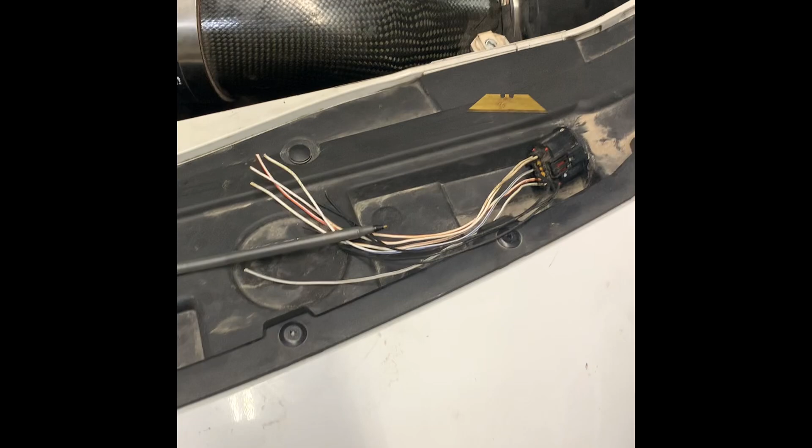Alright guys, I'm about to show y'all how to wire up the headlights. So this is the Challenger pigtail, because it's connected to the harness still. This is the 300 headlight pigtail that goes to this headlight. I got all this information off the website - it's called Mopar Connection Repair Kit.

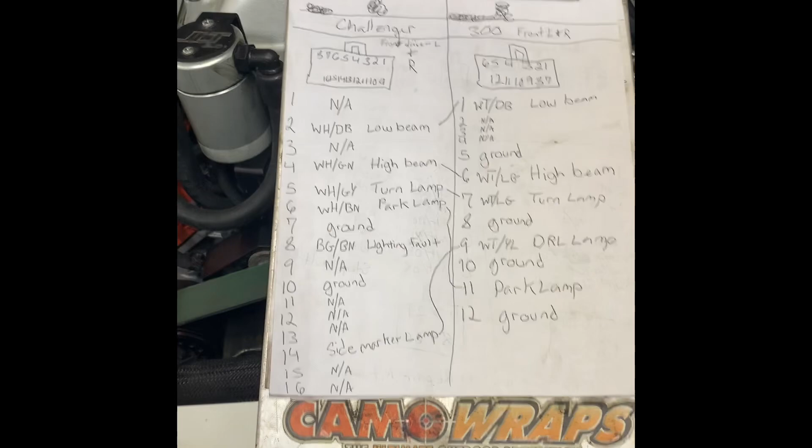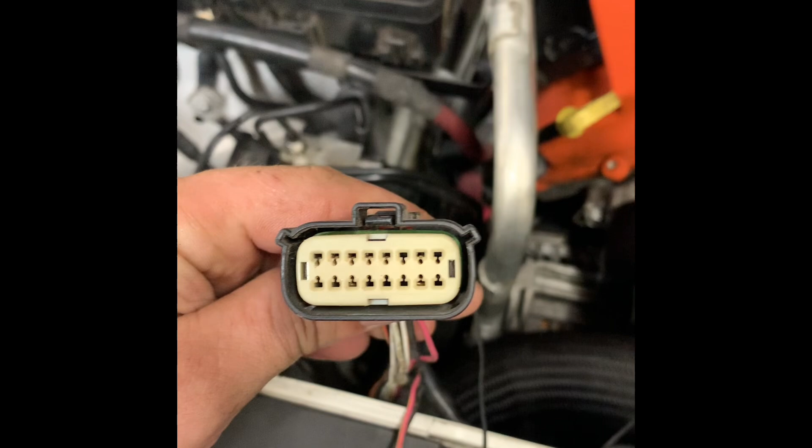You just put in your year, make, and model. On the Challenger side, I put in 2018 Challenger and pulled it up. It gives you a list of all the pigtails throughout the whole car, so I went through the list and found front, driver, left and right, whatever. That's the pigtail right here - you look at it like that, it's the pigtail that clips upward. So it goes 1 through 8, 9 through 16, just like that.

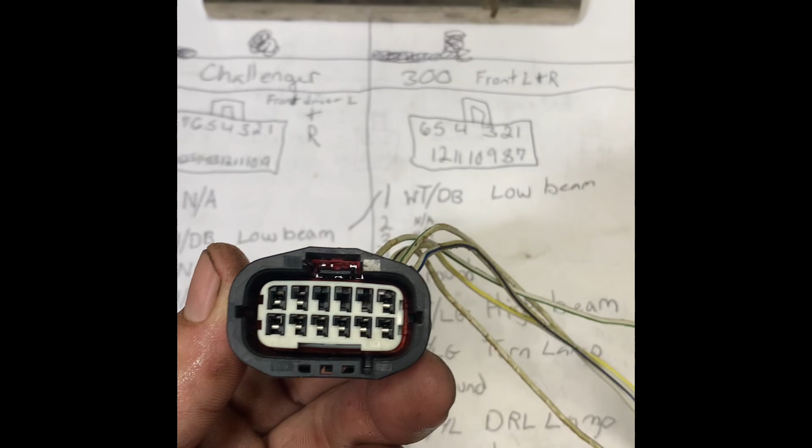This is the information for the 300 headlight. It clips upward, it's 1 through 6, 7 through 12, just like that. And this is your information right here - it tells you what each pin is, since I went ahead and wrote it down.

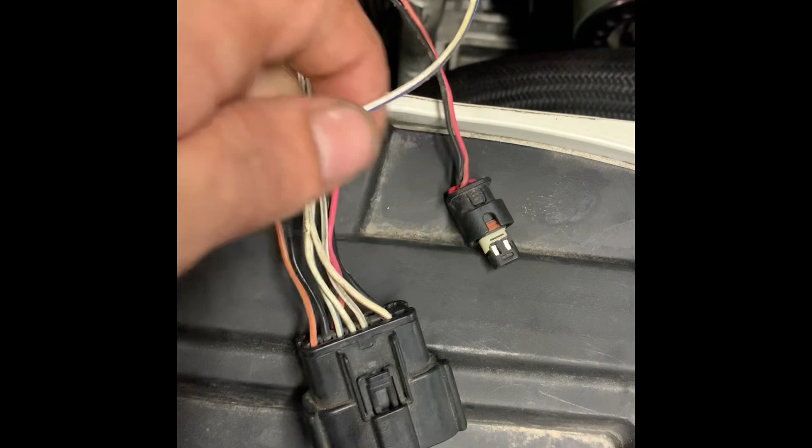So basically what we're going to be doing is - pin 2 on this Challenger plug is the low beam, pin 1 on the 300 plug is the low beam. So what we'll do is match those wires up. Pin 1 on the 300 plug, which should be this one, we'd match it up to pin 2, which would be this one. So we'd match those two wires together - butt them together, solder them together, whatever.

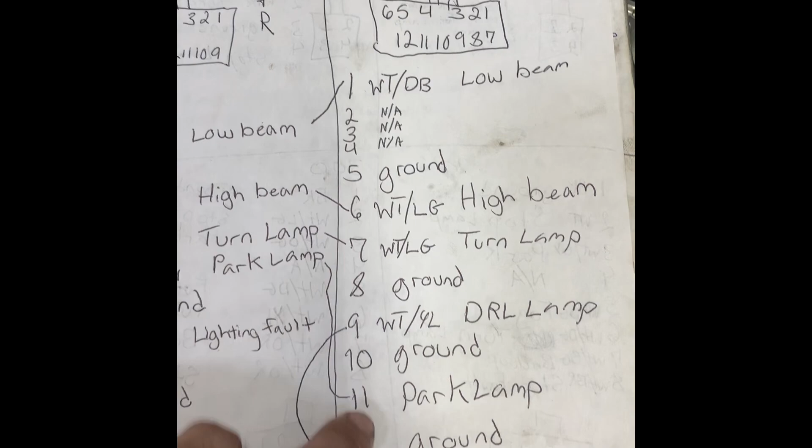Basically that's it. And you see all the blacks are the grounds - you go through, ground, ground, ground, ground. Same thing on this side, they've got ground, ground, ground. So basically what you do is hook up all the grounds together. Sometimes you'll have more grounds on one plug than the other - that's okay, you just double up, putting 2 of these grounds connected to 1 of these grounds just to even it out, or whatever the case may be.

This is an extra - you see the pink and ground on these two. These are basically the same system, which is the side marker lamp. On the Challenger, it's got the halos - these are what controls the halo, which is the side marker. So these two is what we would connect to.

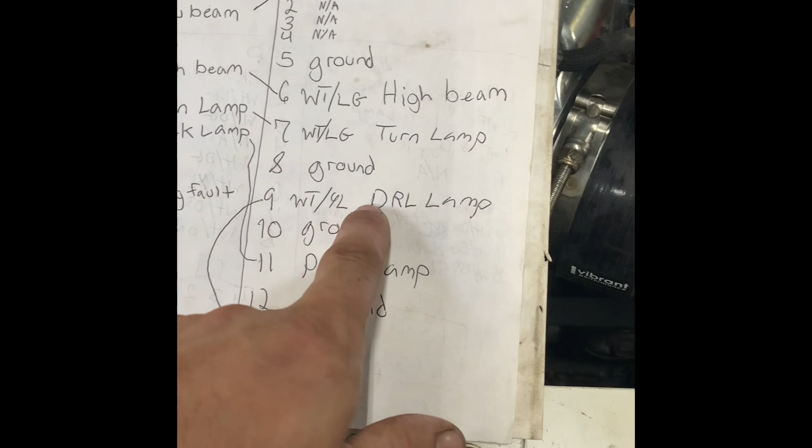DRL stands for daytime running lamp. So basically it would be the outline right here. We would hook those wires up to that on this pigtail - daytime running lamp, so that would be this one right here.

On the Challenger it'd be the halos - we have 2 of them on the Challenger, and on the 300 it only has 1. So what we would do is cap one of these pink wires, because that's the voltage coming in. We'll cut that off and cap the end up so it doesn't rub against anything, and just use one of those to feed into this.

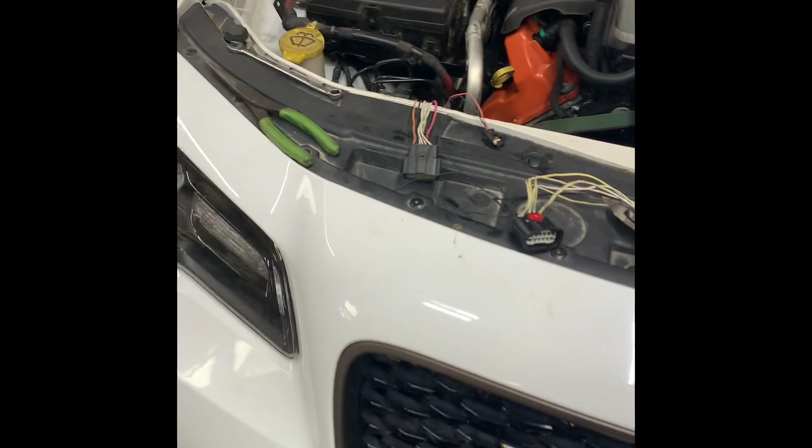Later on, if we want to, we could run this to something like a fog light. I'm not sure, but I'm about to get this wired up, and in a minute I'll be turning the headlights on and showing y'all everything, seeing how it works.

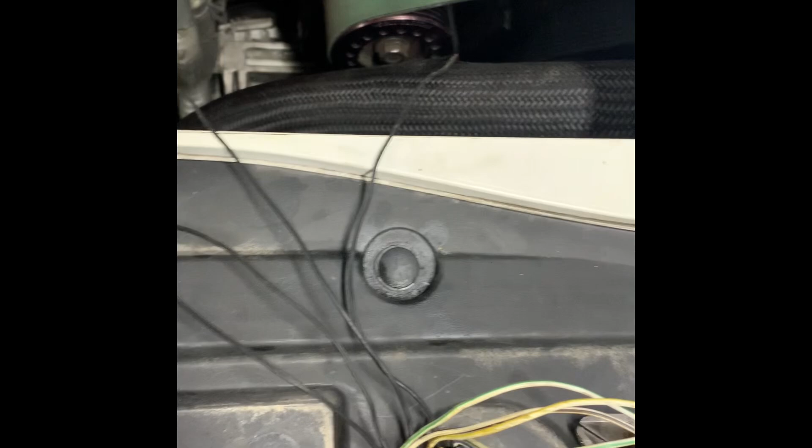Alright, so this is what I was saying. On this side we only have 3 grounds, 3 black wires on this side, and on the 300 pigtail we have 4. So basically what I'll do is butt those 2 together to one of these, 1 to 1, 1 to 1, and it usually works out like that every time, because a ground's just a ground. But we want every pin to have ground, so we'll double those up and run it to 1.

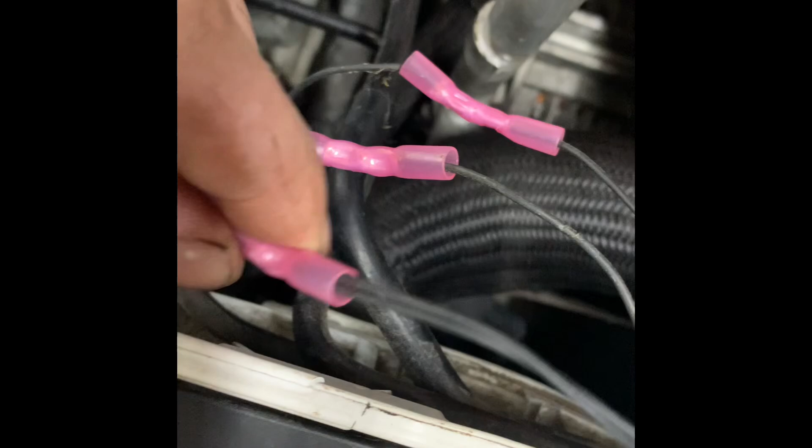Alright, so this is how I did it. Double the 2 grounds, 1 on that side, single, single, single, single. Now, on the grounds, it does not matter which ground goes to which wire on either side, because it's a ground. They're all practically connected, so it doesn't matter which way you go.

Now on the pigtail sides, on all your voltage signals, it does matter which way you go. Now I don't go off a color, which the website does give you descriptions of colors. I write them down anyway, but I really don't go off the color. I go off of the location on where the pin is located in the pigtail, so no matter what, you know for sure.

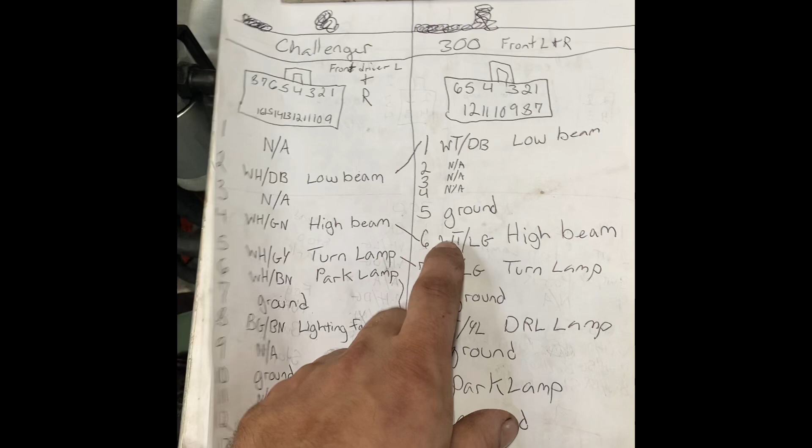So like I got pin 6, I go to pin 6. I know for sure pin 6 is gonna be the high beam, not even going off the color, because as you can see, white, light green, white, light green. So you can't go off the color because there's 2 different pins that are gonna be the same color.

And 9 times out of 10, sometimes the harness is not what color it says in the description. Sometimes it'd be a different color, just because different years and different harnesses, whatever. But that's why I usually just go off of the pin.

So I'm about to go off the pin. The first one would be my low beam, so I'm about to connect pin 2 on the Challenger and pin 1 on the 300. So I'm about to connect those and then work my way on down the list.

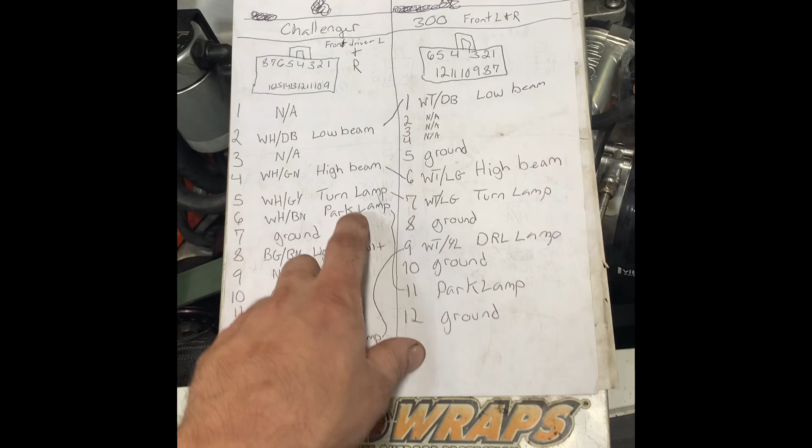And I go to the high beams, connect the high beams. I go to the turn lamp, connect the turn lamp, then the park lamp, then the daytime running lamp, which would be the side marker lamp on the Challenger side. So I'm about to go ahead and hook all those up on this side and get it working.

Alright, so I got all of them swapped over. There's one left over, which is the lighting fault, so that one does not need to be hooked up at all. So like I did on this pink wire, I just cut it down there, not hooking up nothing to it.

So basically that's what I'm gonna do with this one. I'm just gonna cut it down so nothing affects it, then put a piece of electrical tape over the top of it, or a twist nut or something like that. So basically I got them all wired up.

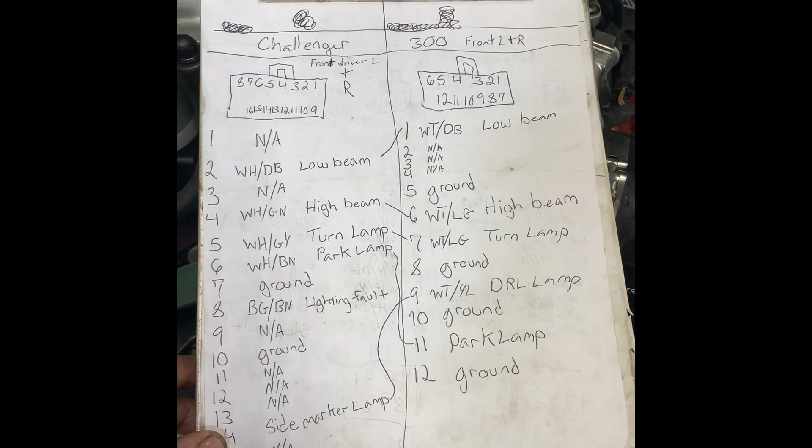Basic, easy, you know, go to the website, find the right connectors, put in the right car. If you don't put in the right car, you're obviously not gonna get the right connector. But do that, get your information however you like, screenshot it, save it, download it, write it, transfer it over to a piece of paper, whatever, just to get your information.

It's basically really easy. Once you get this information, it's common sense. But if you don't have this information, you're gonna be shooting in the dark with a voltage meter and power probe trying to figure it out. Before I found the website, that was the way I'd do it. I would just voltage test everything while somebody's in there flipping switches and stuff. But I'm about to plug it in now and see how everything works.

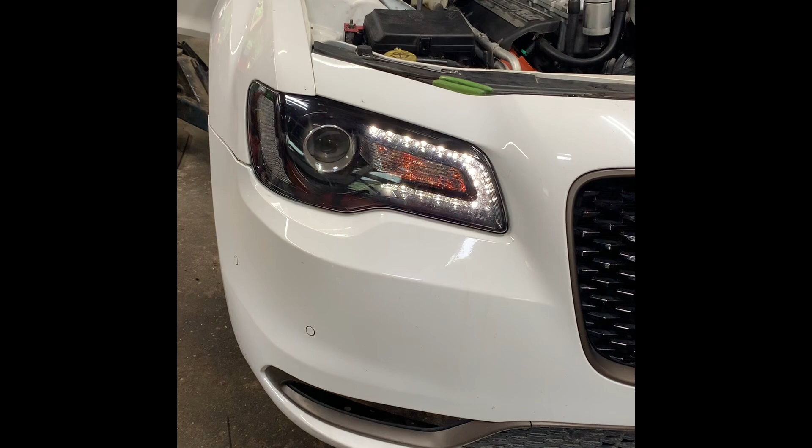So we got the daytime running light working and we got the blinker working. We're about to check the headlights, but we got some type of wiring issue going on in the car. For some reason we can't get the ignition to turn on.

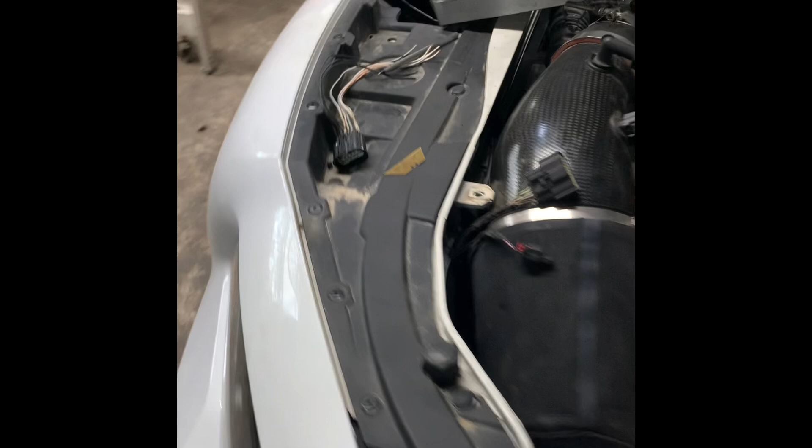I'm just gonna keep finishing up wiring the headlight. I got this side wired in all the way, I know it's gonna work. I've already did this swap before with a 392 and everything works, but we got to figure out what's going on with the electrical system, why the ignition's not powering on. This is just nothing, but we'll figure it out.

We're about to tear apart the whole car to go over the whole harness one more time and make sure we got everything plugged in. All right, so we figured it out. The body control module, one of the plugs wasn't even plugged in all the way, and one of the plugs in the back for the control module back there wasn't plugged in all the way either. So we got those plugged in all the way. Ignition turns on, headlights work, taillights work, everything works now.

So all we need now is the fuel line, put coolant in the intercooler and radiator, and install the coolant plugs in the block. Whenever we got the block brought to the machine shop, they did all the machine work, but they didn't put the freeze plugs back in. So we ordered them at O'Reilly's. We're about to go pick them up, install them in the block, and run coolant in the car.

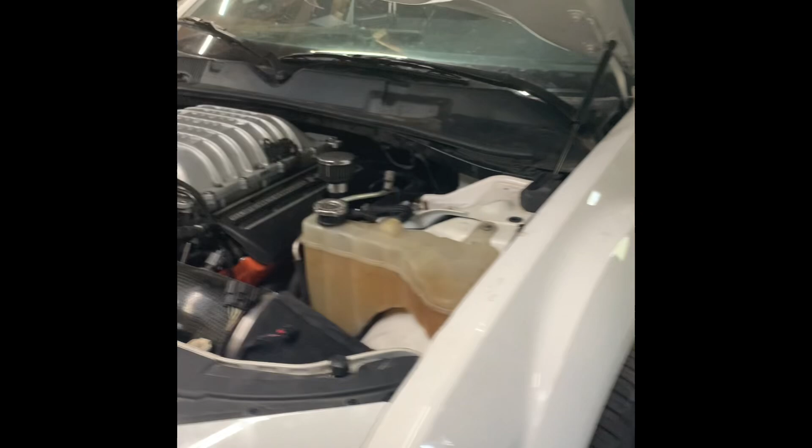All we're waiting on now is literally, I still got to wire up this whole headlight assembly, but all we're waiting on now is a fuel line. We ordered the fuel line kit, a steel braided fuel line and return, but we're just waiting on that in the mail, and then we'll be able to fire up.

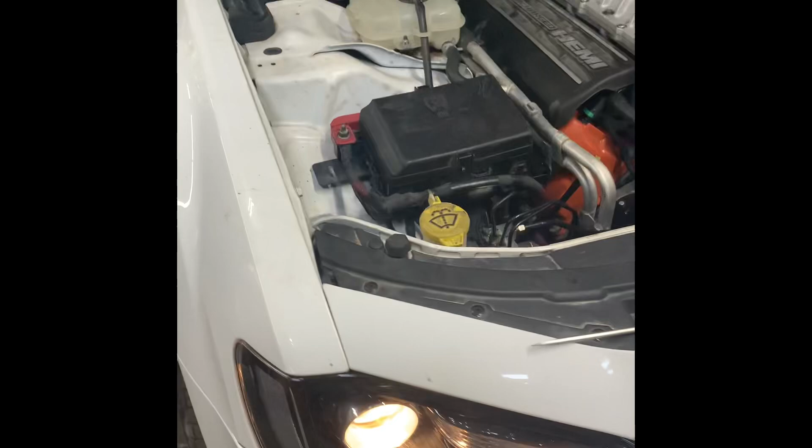We done tore apart the whole inside trying to figure out what the problem was, and putting it all back together now. Figured out the problem, got it all fixed up. Ooh, look at them taillights, that's the running lights right there along with the headlights. Let me just cut them off. Oh yeah, I need the key, but anyway, we got everything working, just gotta install everything back up.

Still having problems figuring out the brake switch on these, so we haven't wired up the brake switch or the turn signals yet, still trying to figure that out. I'm doing research on it, trial and error. But I'm about to go ahead and wire up this headlight, finish that, and we're gonna tidy up the whole interior, and we'll just be waiting on the fuel line.

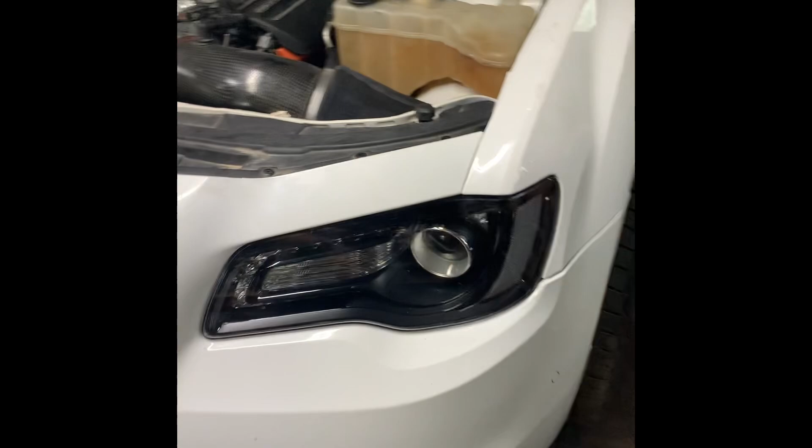All right, so I just finished wiring up this headlight. I had that headlight wired up already, just finished this one. I'm about to flip the switch and see if the headlights work. Switch is on. Headlights are working.

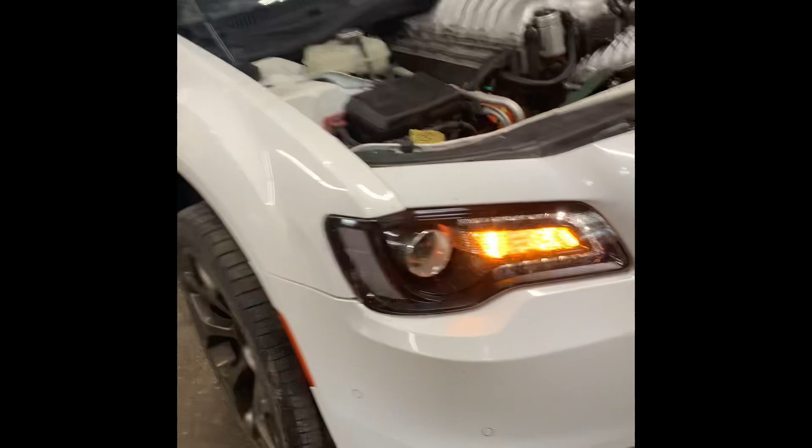All right, now let's put it on the running lights. See, running lights. Oh yeah. All right, now let's check if the blinkers work. Just hit the hazards. Hell yeah. So everything's working with the headlights in the front, working great.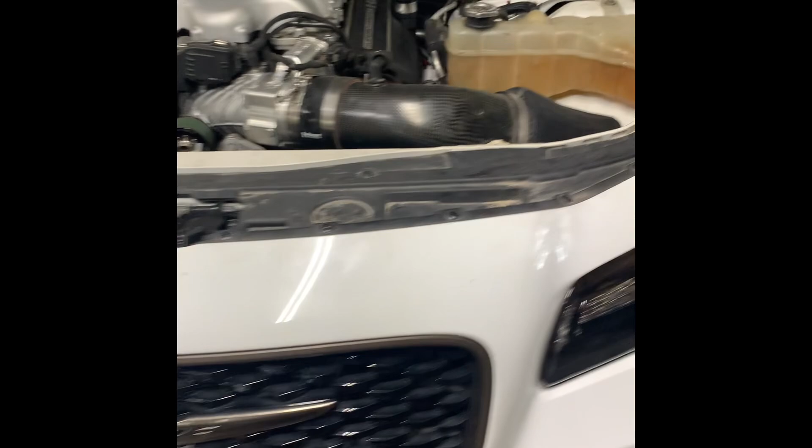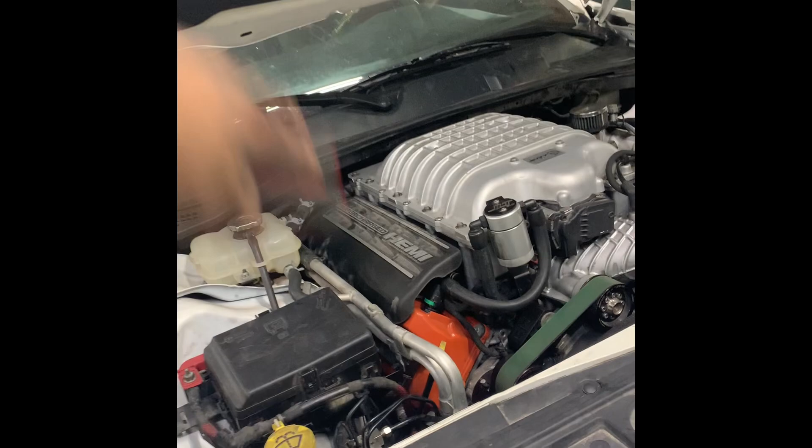Alright, so we got the headlights wired up. Now we're working on the taillights. So far we got running lights working, and that's it. We still gotta do blinkers, stop, and reverse light, still got to figure that out. So far we only got the running lights working, so I'm about to do some more research on that and play with the wires with my voltmeter and power probe. I'm about to get to that now, and as soon as I get those rear taillights fixed and working, I'll take a video of them working and how I got them wired up. Then all we gotta do now is the fuel line. The fuel line is the only thing stopping us from firing up this engine.

The only thing is that fuel line needs to hurry up. We ordered it and it's supposed to be here today, but so far we ain't got it. Hopefully we'll have it tomorrow and we can get this thing fired up.

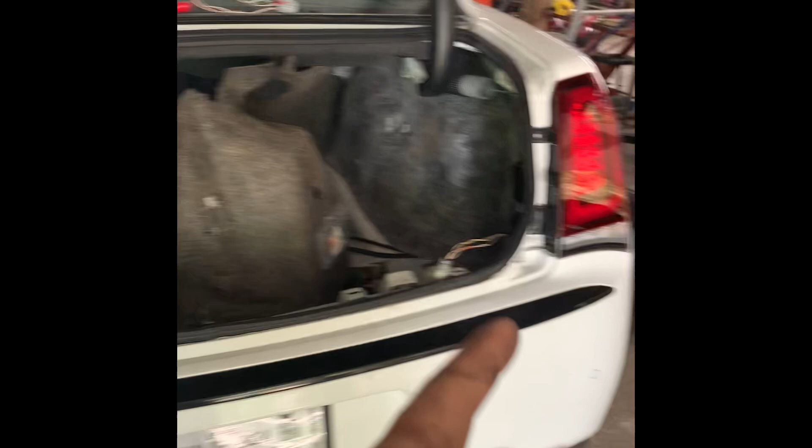But for now, I'm gonna keep playing with these taillights and hopefully get them working. All right guys, I'm gonna show y'all how to wire up the taillights right now. These are the pigtails, the original pigtails for these taillights, and as you can see, they plug in.

And these are the Dodge Challenger ones, you see they're still in the harness. This is the Dodge Challenger body harness in this 300 - we did all that just to make it run. So we're gonna rewire this plug to this plug, and I'm about to show y'all how to do that. Same thing on this side.

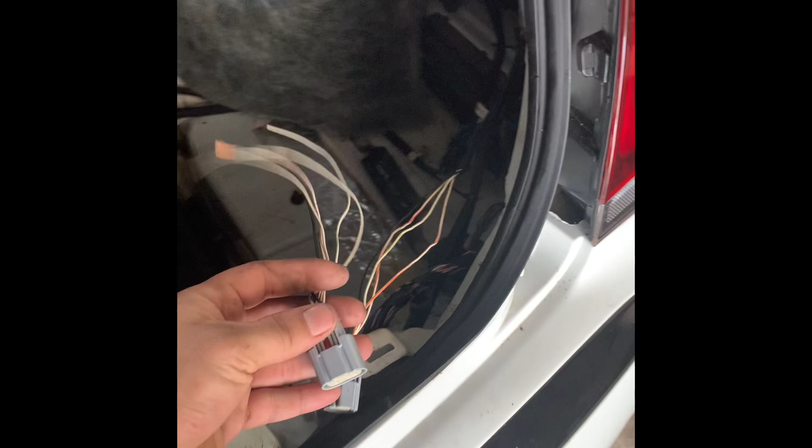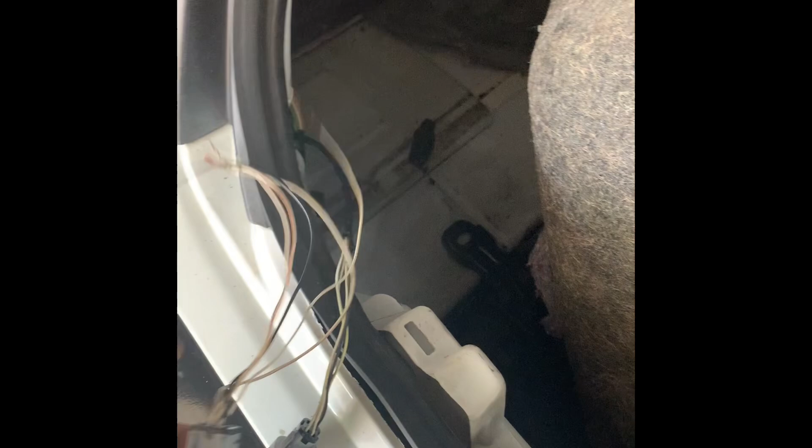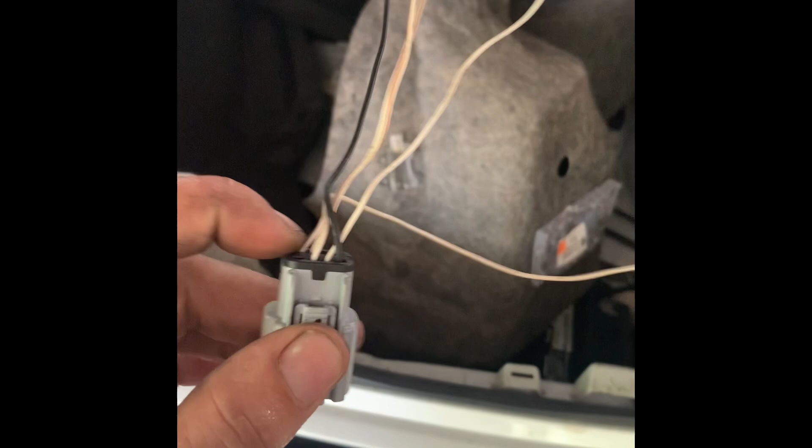Basically what we're gonna do is tie these wires into these wires. On the internet there's a website called Dodge Connector Fix - you look that up on Google, and when you click that, you put in what kind of car you're looking for, and it'll bust out a whole list of all the pigtail connectors throughout the whole car. It'll literally tell you what each wire is and give you a description, tell you where it's at in the plug, show you which one it is, the color of the wire, everything.

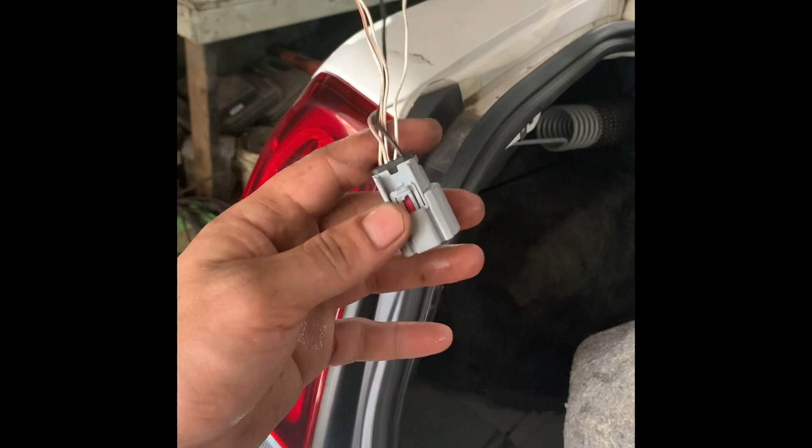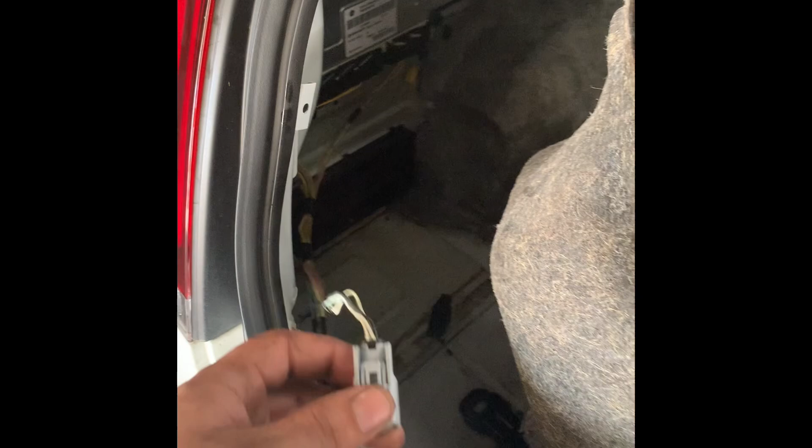So basically I'm gonna go in there and look up this year 300, and take a screenshot - that would be these pigtails. Then I'm gonna go look up the Challenger, the year, make and model that this harness came out of, and go to the taillights. There's gonna be multiple different options, you just scroll through and find what pigtail you're looking for. So go through this, then take a screenshot, you got your screenshots on your phone or computer, whatever.

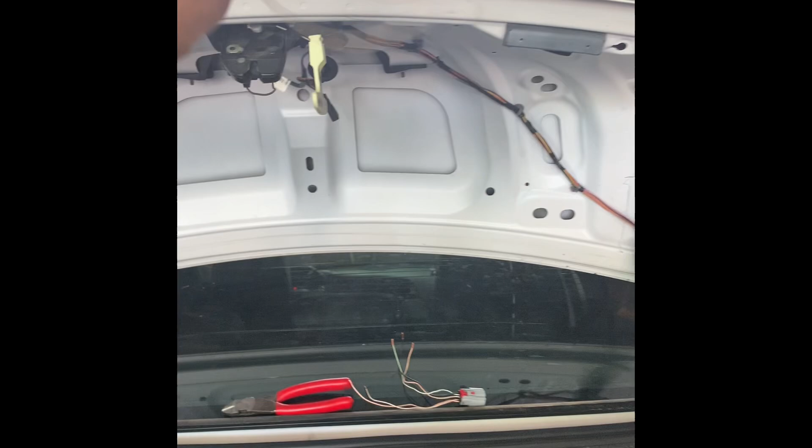Then you just sit there and cut the wire and literally butt them up. Now this one has 5 and this one has 4, so 4 of these are going to get used, and there's going to be one more wire left over, meaning that's your reverse light, because this does not have the reverse light wire in it. If you follow the wires up to this plug right here, this has your reverse light wire right here. So you're going to have to wire that all the way back through and hook it up to both sides so you can have reverse lights, because on the Challenger the reverse lights were in the 3rd taillight across the back.

So it's pretty common sense, you just got to go to that website and look up each connector and take screenshots or whatever you got to do to remember it, write it down, whatnot. But it'll literally tell you where each wire goes, the color of the wire, and what the wire is.

Now obviously this black one, that's a ground, and it's going to be a ground on this side too. So those, you can see on this one there's a black one, ground - those you can automatically just hook up because you already know that's a ground. So that would be the first thing you do - just hook up that ground, boom, wire those in. Then you would go look at the diagram and just match them up. It's that easy.

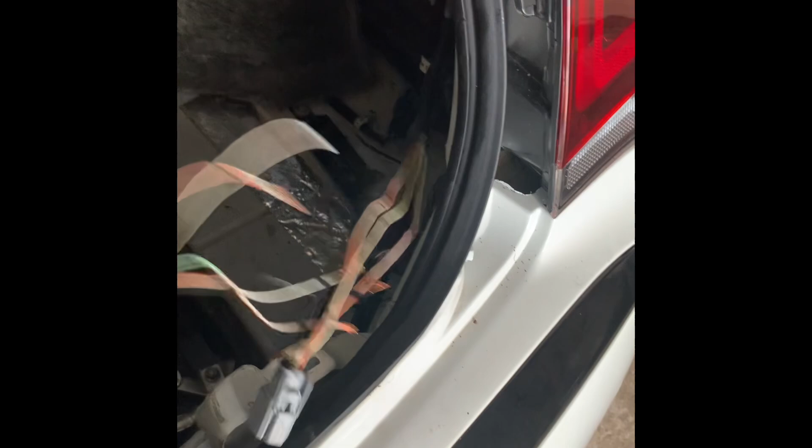So I'm about to cut this, prep them, match them all up, and we'll see if we got the brake lights working or not.

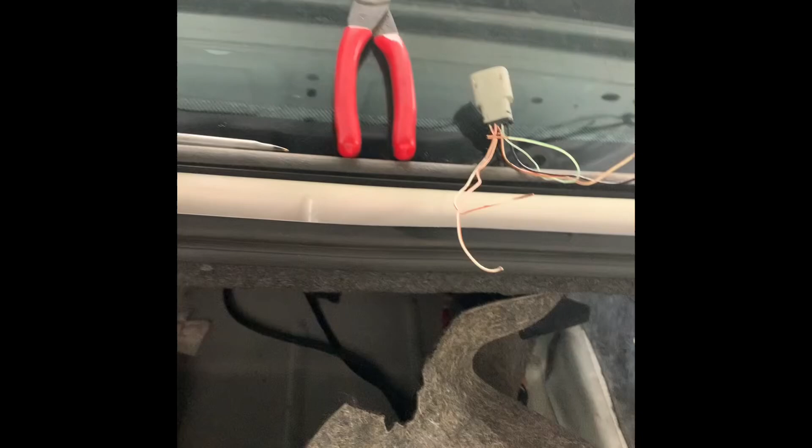All right, so I made y'all a little diagram on these pigtails. Like I was saying, these are original pigtails for the 300, and this is the Challenger pigtail. So I made this little paper diagram right off of the website I was just telling y'all about - Mopar Connection Repair Kit. You type that in on Google and it'll literally be the first thing pulled up. I think it's Connection Repair Kit dot mopar dot com is the actual website.

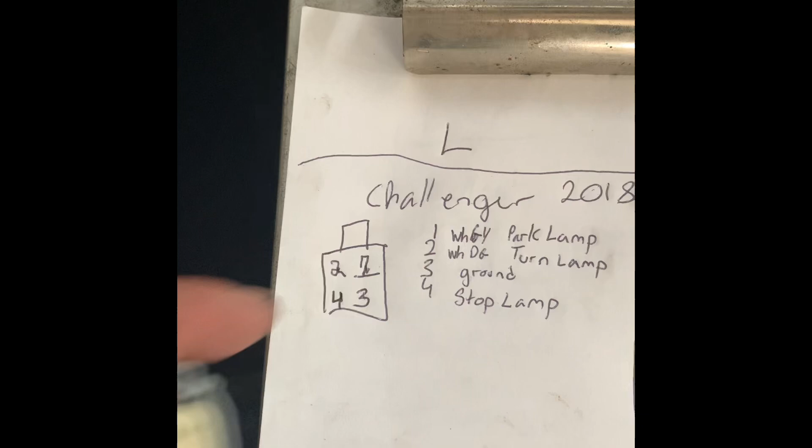So as you can see, we got a 4-pronged pigtail. This is the Dodge Challenger, left and right, the Challenger 18. So I got the pigtail right. Now you got 1, 2, 3, 4, those are the pins right here. Starting from right to left, 1, 2, 3, 4 would be the pins, and these are the descriptions of the pins.

1, white gray, or whatever, would be the park, and then white dark green would be the turn lamp, and number 3 is the ground, number 4 would be the stoplight.

As you can see, these are the wires. You see the black one's the ground, right? Number 3, ground, so those are always going to be ground. Go down to the pigtail for the 300, you see got number 1's ground, right? So go look here, number 1, black, ground. So that's how you tell.

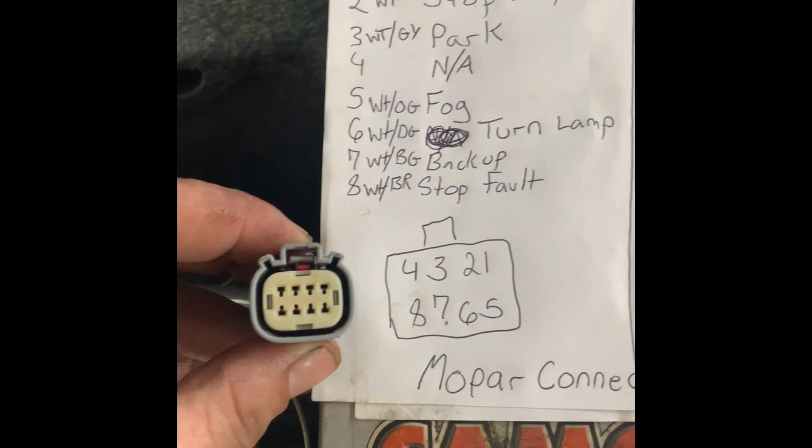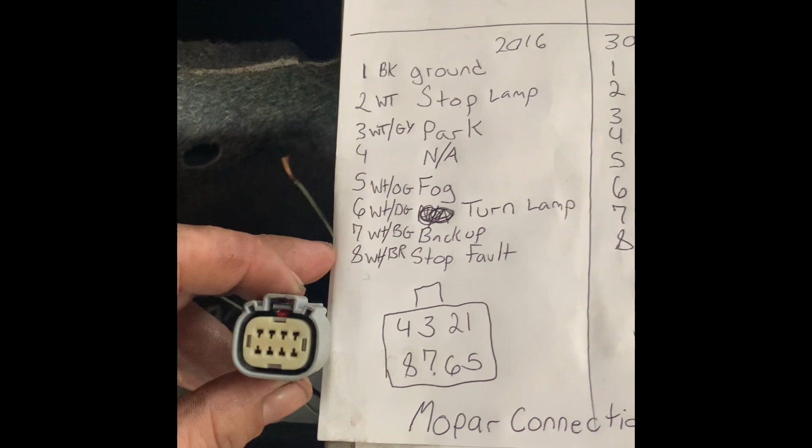So this would be the connection label on that one. 1, 2, 3, 4, 5, 6, 7, 8. You got your ground, your stop, your park, not used, your fog light, your turn lamp, your backup lights, and your stop fault. Now your stop fault is probably going to be the one that's not going to be wired up at all. So this is basically, I got all this information off the website, like I said.

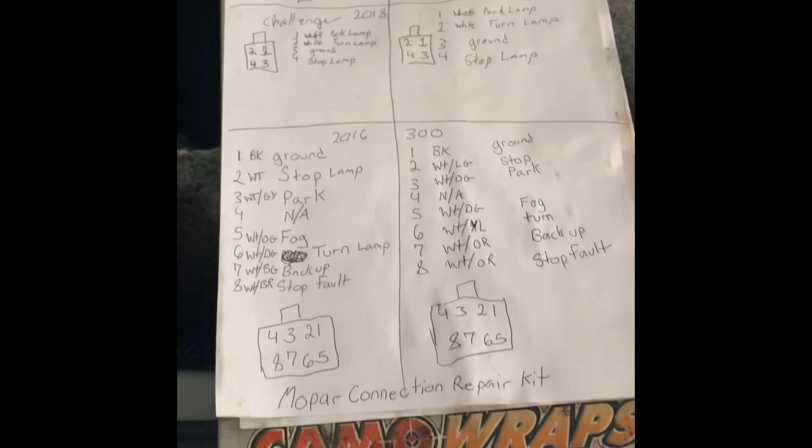So a little bit sloppy. I just made this because I didn't know how to screen video on my phone yet to show y'all the website. But this is a great diagram. So I'm basically just gonna go through here and match up these connectors with these connectors, right?

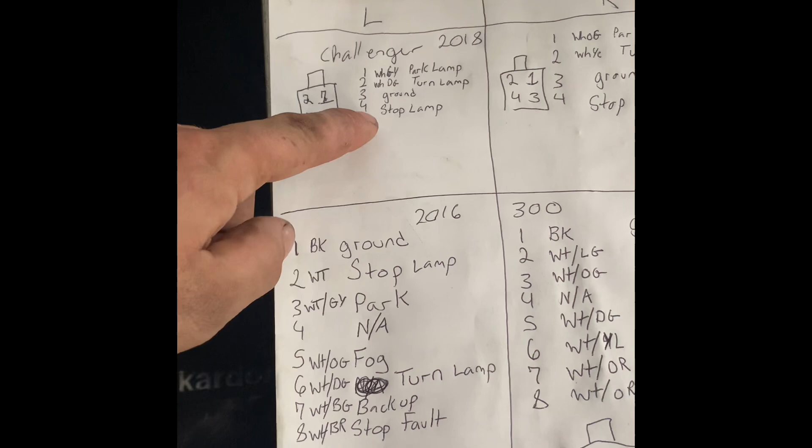So we got ground, you connect those two. Stop lamp, you connect those. Park lamp, you connect those. Go down here to turn lamp, connect those. And you're gonna have fog, backup, and stop fault not connected.

But what we're gonna do is we're gonna wire up the backup light, because the backup light is on this pigtail connector right here. So we're gonna pull that wire all the way back through and wire it up on both sides so we can have reverse lights.

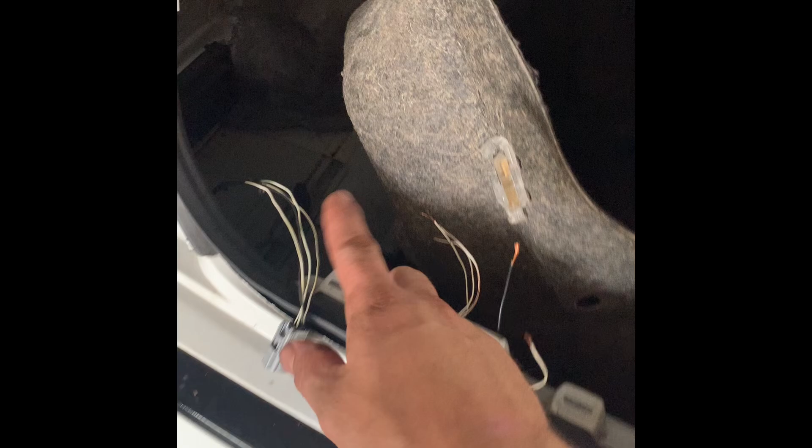But I'm gonna go ahead and start swapping over everything I can on these pigtails right now. And when I get back with y'all, I'll be pressing the brakes to see if the brakes work, seeing if the emergency brakes work, the brake pedal works, seeing if the turn signals work, stuff like that.

I'm about to go ahead and just butt connector these together just to make things simple. And it's pretty simple, like I was saying. You just connect them, boom, boom, boom, boom, boom. Easy. The 300 pigtail, I put

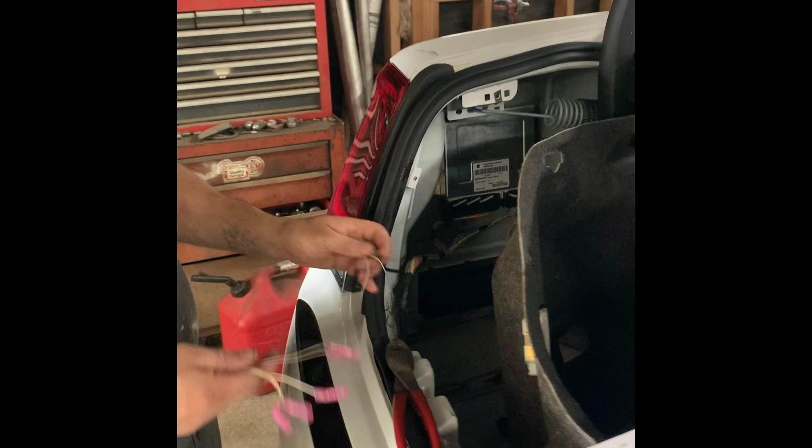Butt connectors on the ends of it already. So I cut the Challenger pigtail off. The Challenger pigtail right here. So I'm gonna go ahead and go off of what wires are which.

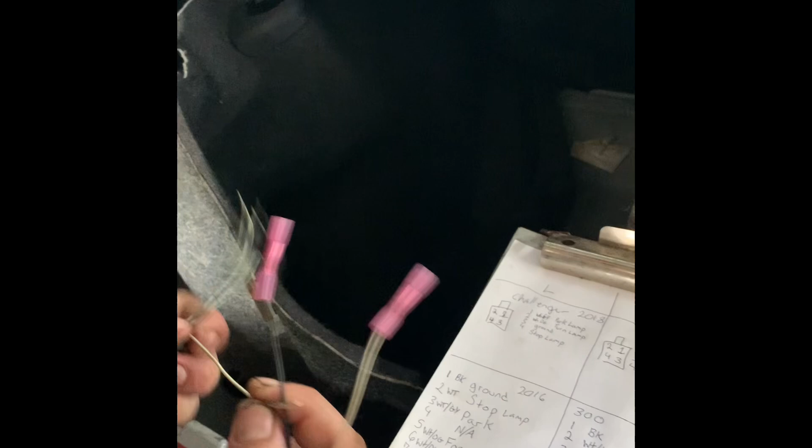So we're gonna start with number 1, right? Number 1 pins right there. Number 1, it's the park lamp. Let's see what color it is. White gray, right there, white gray. So we go over here and we find white gray, and then we go down here. So that would be the park lamp.

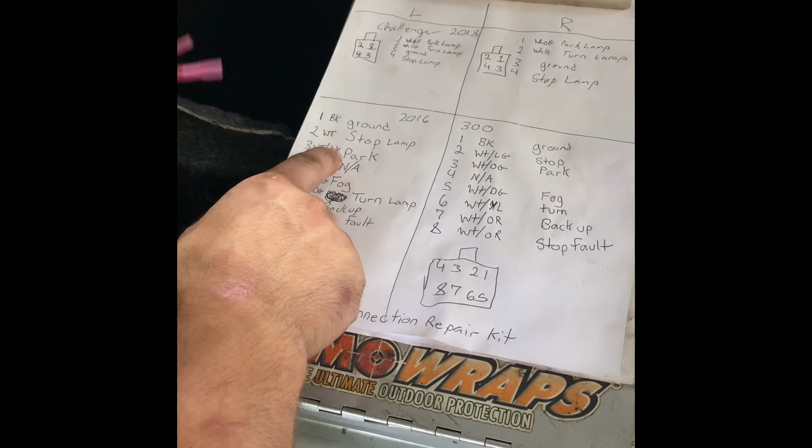So we go over here, find park. Park would be pin 3. Pin 3 is this one, white gray. Look right here, white gray, pin 3, white gray, pin 3. Pin 1 on that one, pin 3 on this one. Anyway, they're both white gray, so we're gonna go ahead and connect these, because that's the park lamp.

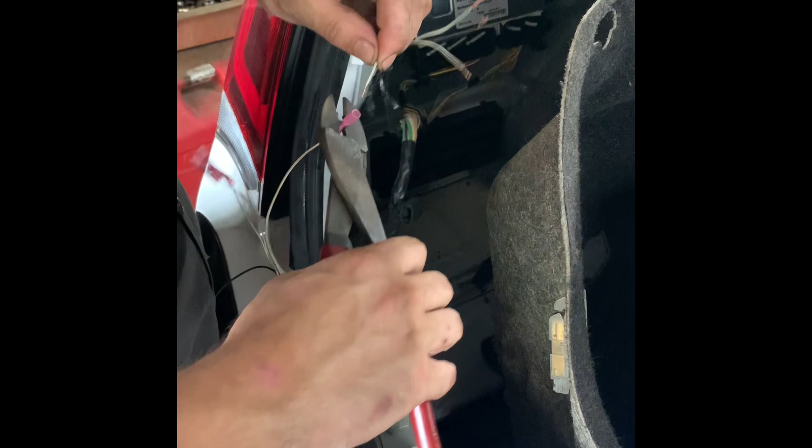Now I know what y'all are saying, why are you not soldering? Well, I'm out of solder, so let's move on.

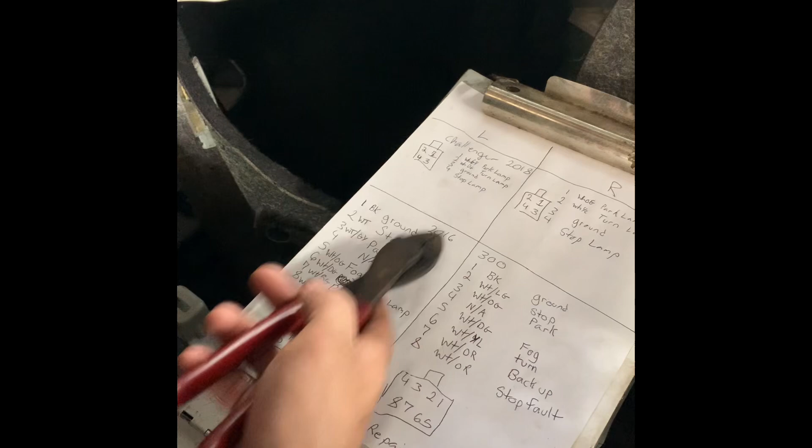So we're gonna move on to pin 2. Boom, pin 2 right there. Pin 2, pin 2. So pin 2 is our turn lamp, which is white green. The description is white green. So we go down here and we look for our turn lamp. Our turn lamp's right here, pin 6. There's the pin number 6, white, dark green.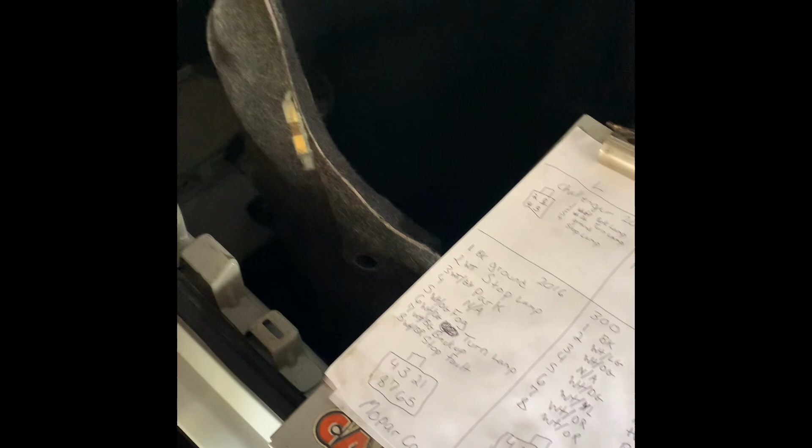So we go over here. We got white green, which would be pin 2 on this, which they do match up. So that one's white and green. And we go down here to pin number 6. So pin number 6, well, that's, nothing's in pin number 6. Well then, we'll come back to that and figure it out.

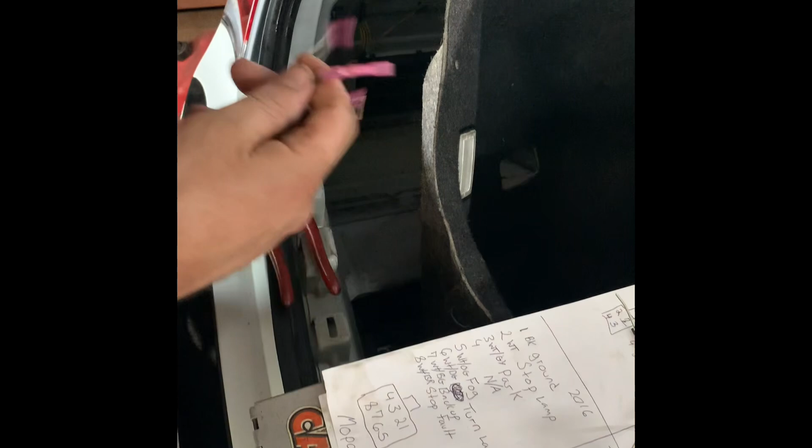That, move on to the next. Number 3, which is a ground, black ground. We know we're here, number 1. Pin number 1 on this one is a ground. We're gonna go ahead and just hook those up.

Go. We got the ground hooked up. Now we go to the next one.

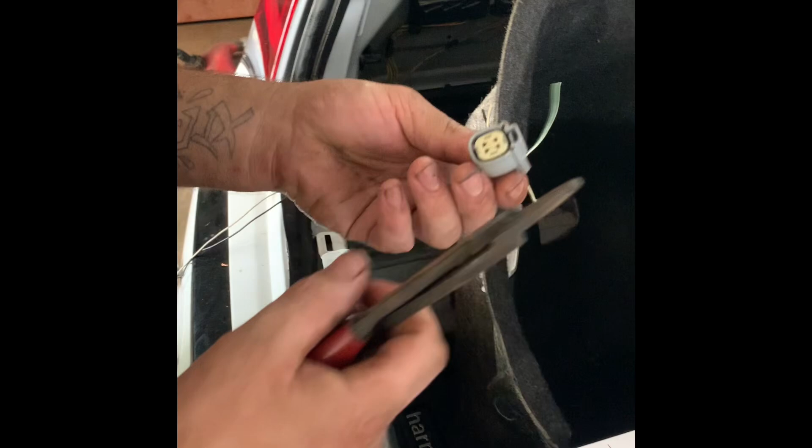Pin number 4, the stop lamp. I don't know why I didn't write the color on that. But anyway, pin number 4, let's look here. Pin number 4 is this white and brown, or black, whichever one.

Which is this one. So we go down here, we look for a stop lamp on the 300 pin, which is pin number 2. We look here, we got pin number 2 right here, which is all white. Right here it says all white.

Okay, so we're hooking up the stoplight now. So whenever we hit the brakes, this is the wire that gives the signal for stopping. So we got our ground, our stoplight, and we got our park lamp.

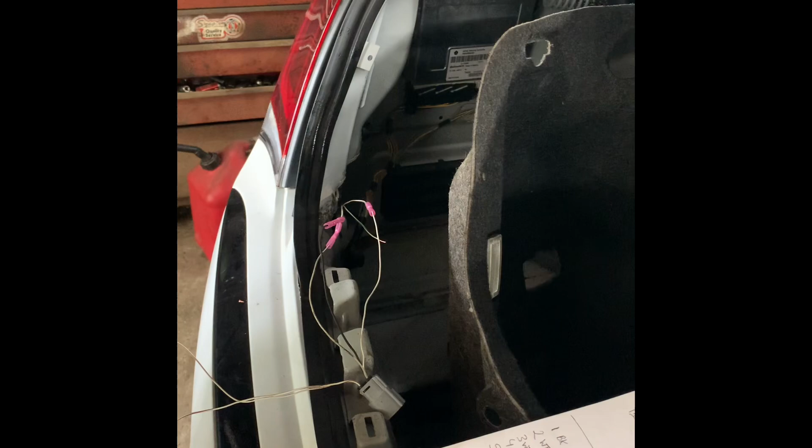So we need to figure out which one of these is the turn signal. So let me go do some research and figure out what we got wrong with this little diagram.

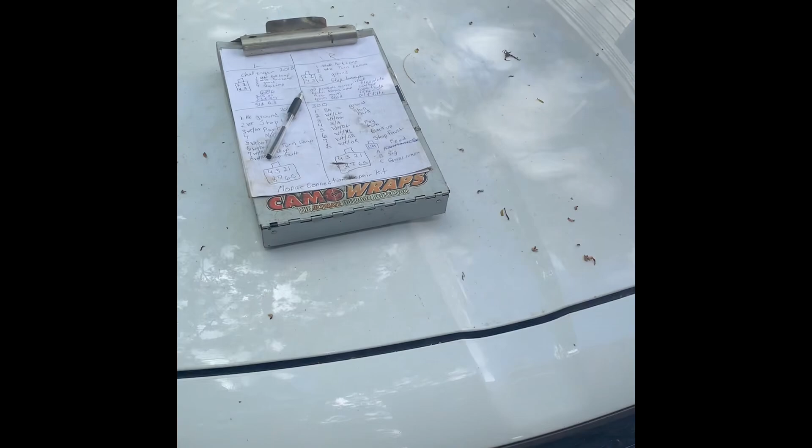Alright guys, so I solved the brake issue that we were having. Here's the diagram again for the rear pigtails for the tail lights. When I was showing y'all in the video a minute ago, I was not hooking them up correctly. Now I will show you how to hook them up correctly.

So this is the Challenger pigtail, right? So you got park lamp, turn lamp, ground, and stop lamp.

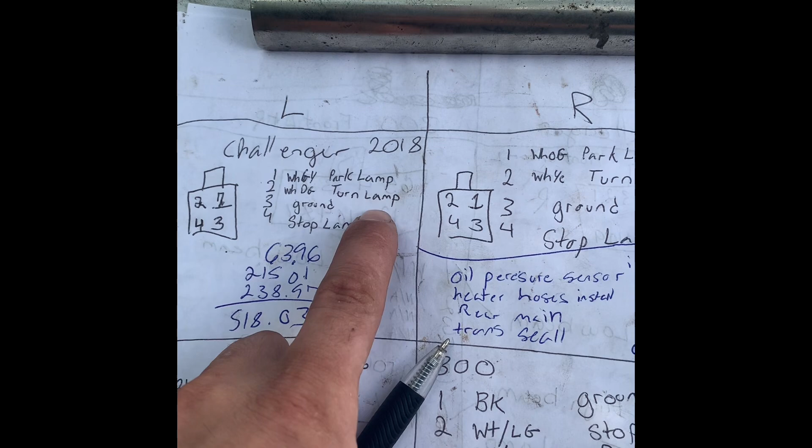Whoa, I wrote it down wrong. This is not a stop lamp, this is the stop-fail-safe, some type of computer sensing. So on these Challenger pigtails, the turn lamp is also the signal for stopping. So I did not know that, and I thought this was the stop lamp right here.

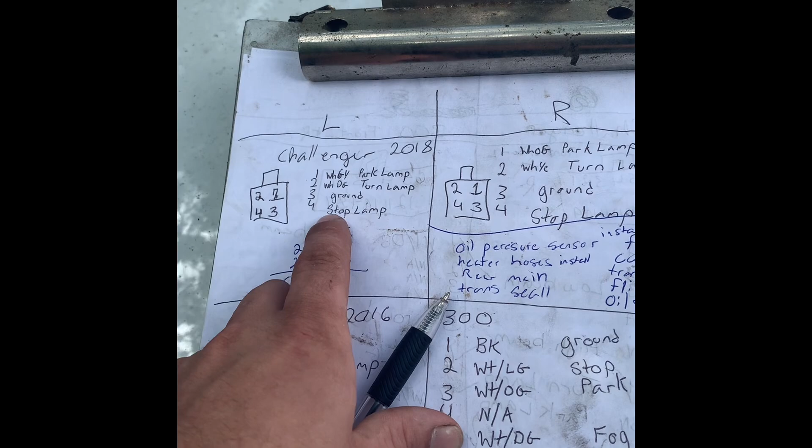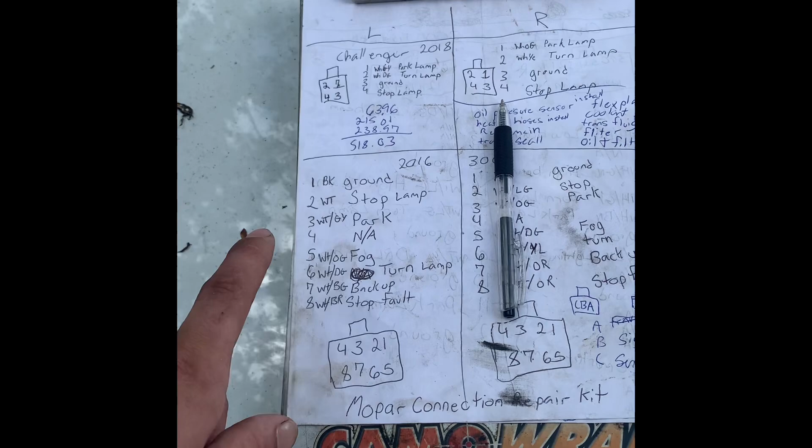So I wired pin 4 into pin 2 right here on the 300 pigtail. So I had that wrong. So what I had to do is wire pin 2, the turn lamp, had to go to the stop on the 300 pigtail. So that's how I fixed the brake light and turning lights. It was just that was in the wrong spot.

As for the reverse lights, I had to wire -- when I was showing y'all that pigtail, there was a pigtail in the center right here. I had to get the reverse light and wire it all back, pull the wire back out the loom. I just pulled it all the way through and then extended it to here and to there. So in that pigtail, in the Challenger, the reverse lights was in the center right here.

Watch, I'll show you on this car. So reverse lights are here in the center. This is turning and all that. So reverse light, it's in the trunk pigtail.

So the wire would come up, go across the trunk, and then plug in here, and that would be the reverse light. So you got to wire those, pull those wires back and plug them into each end, which in that -- yes, you just wire them back, hook them up.

There is a left and there is a right in that pigtail. Go to the website, find the diagram, and just like how I did with these, go to the website, get the diagram for the center, and you'll see which ones are the reverse lights. And you just rewire those white wires back down, and you would put them right here.

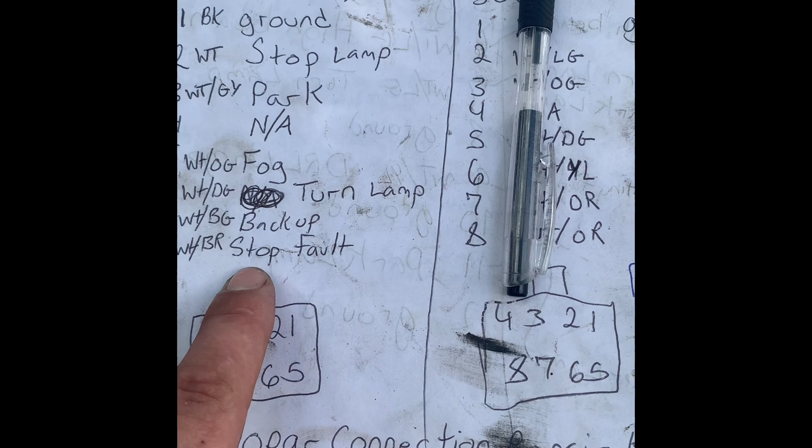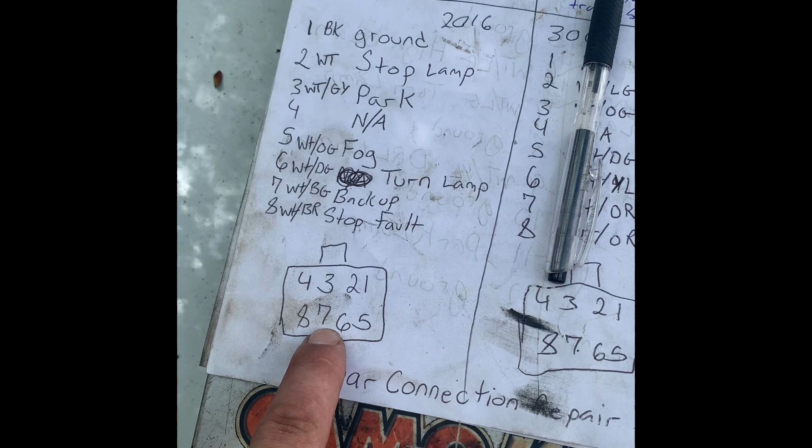Pin 7. So this is the Dodge 300 pigtail that plugs into the tail lights on the 300. So you would wire up -- see, on the Challenger, the tail lights on the ends don't have the reverse. So it's in the center. The center plug that's on the trunk will have the reverse lights.

So you have to wire them back, like I was saying, and then that's where you would go: pin 7, backup lights. So that's how I fixed the back light issue. So every light, front lights and rear lights, work perfectly fine. Just follow these directions and you'll be great.